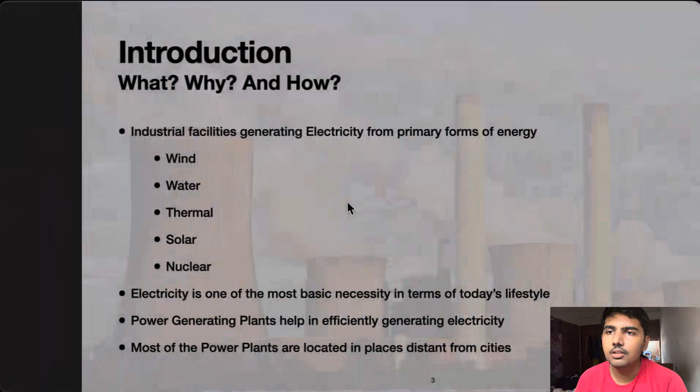The first question that might come to our mind is, what are power plants and why are they so important? To answer this, power plants are industrial facilities generating power and electricity from the primary forms of energy, which are wind, water, thermal, solar, and nuclear.

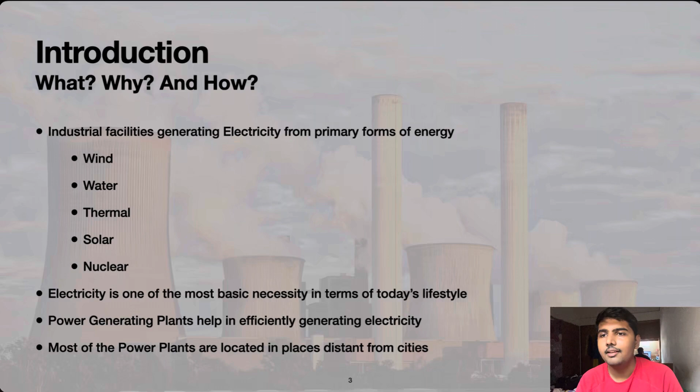Everything had changed after Benjamin Franklin's discovery of electricity and Edison's invention of the bulb, and slowly, entire humanity was consumed by it, making electricity as essential as water and food. Electricity has to be generated efficiently to conserve resources, as an overuse can cause problems for our future generations.

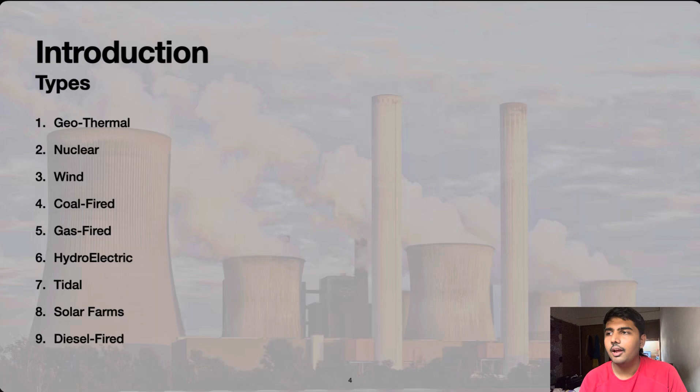Now, let's have a look at types of power plants. They can be broadly categorized into four types: thermal, wind, solar, and hydro.

Let's take a look at some examples of solar farms, wind farms, and other power plants. Solar panels spanning over a large amount of area is sufficient to generate a huge amount of electricity in a very passive mode. They consist of large collections of photovoltaic cells and can be used for personal use as well as industrial use.

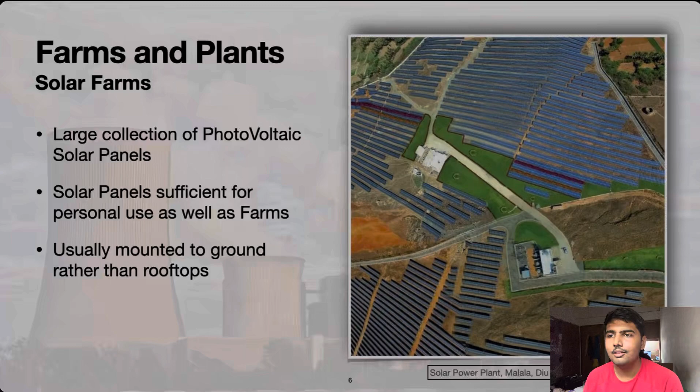Diu is one such example, where the entire electricity comes from a solar plant in Malala spanning over 51 acres of land. This has made Diu one of the only islands in India to have its own electricity generation grid coming from a solar power plant.

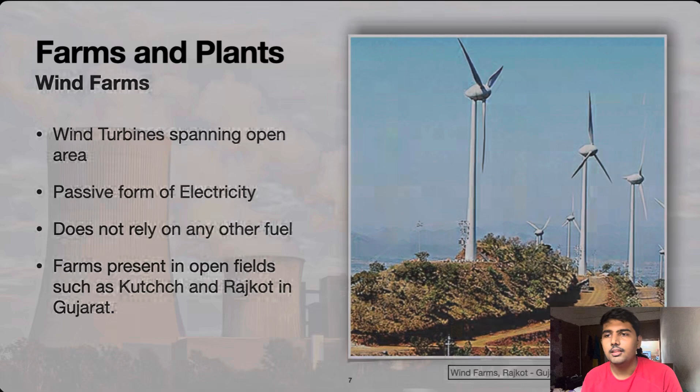Wind farms are chosen to be installed in open areas away from civilization as to not interfere with energy generation. Ideal wind speeds for a windmill farm to operate is 18 to 25 km per hour. They are the best form of passive energy as they do not rely on any other form of industry.

Next come the fuel plants, which are thermal-based power plants that burn fossil fuel and project the pressurized gas and heat onto a turbine. The most common residue are carbon dioxide and fly ash.

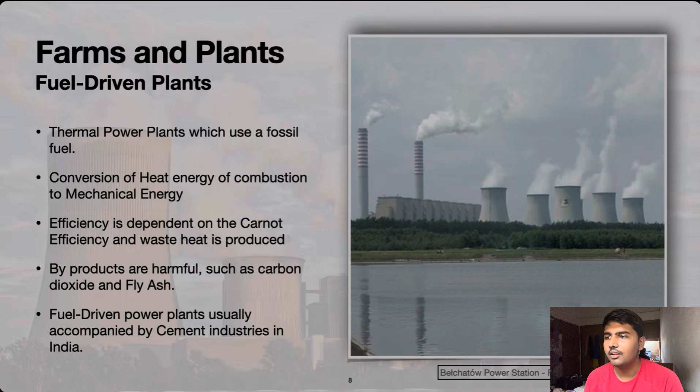Fly ash is used to help fasten the process of cement generation, and they are usually accompanied with a cement factory. The only drawback of fuel-driven power plants is the Carnot cycle and Carnot efficiency of the fuel being used. Also, it gives a very massive carbon footprint.

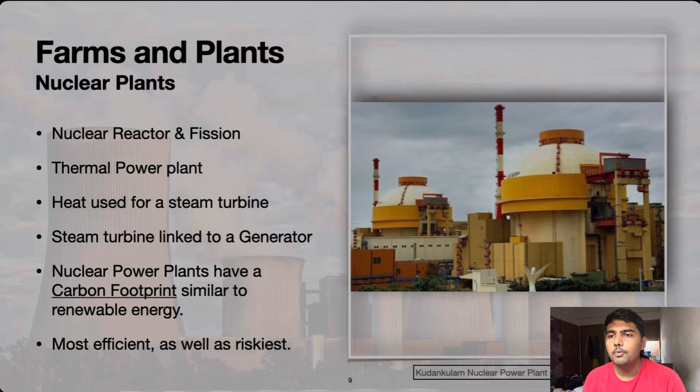Next is the nuclear plants, which work on the principle of nuclear fission. Fission is the breaking down of atoms, and this breakdown is what generates a massive form of energy, specifically heat. Fission is done inside a nuclear reactor, and the reactor then projects the heat to a steam turbine, generating electricity.

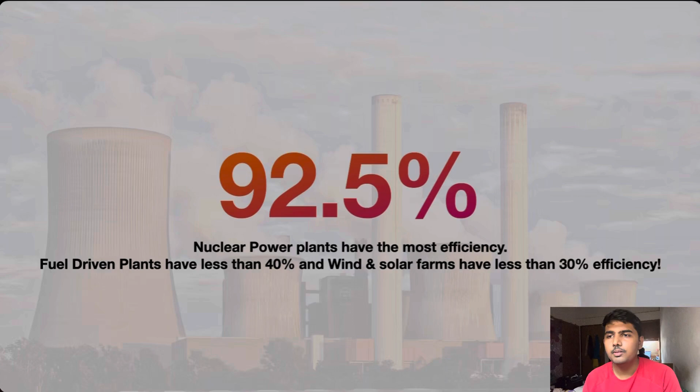They have a carbon footprint similar to that of a renewable source of energy. They are the most efficient source of energy, and they can generate clean energy at a whopping 92.5% efficiency. This is more than double of most of the aforementioned power plants.

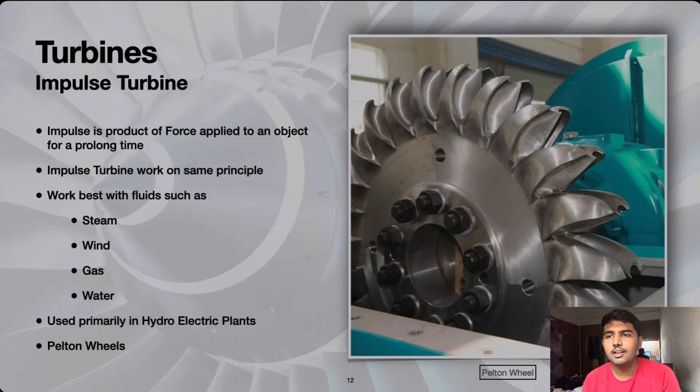Now, let's discuss the most important part of a power plant: turbines. Let's talk about an impulse turbine. This is one of the most commonly used turbines when it comes to any sort of hydroelectric power plant, and its functionality is rather simple. It works best when working in conjunction with any sort of pressurized fluid.

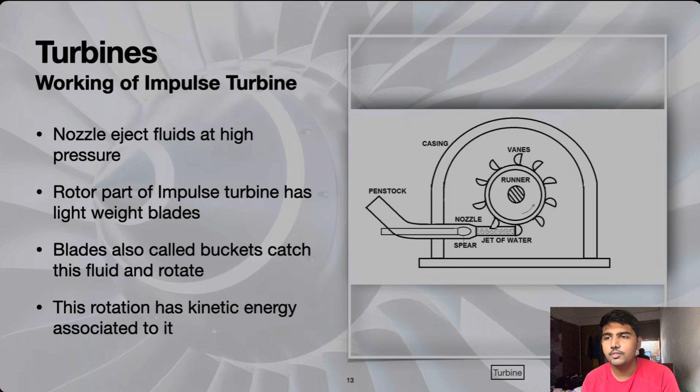One such example is the Pelton wheel. A Pelton wheel is a wheel having a set of blades on its periphery. It consists of a nozzle that ejects fluids at very high speeds. The rotatory part of the Pelton wheel then rotates the rotor part of a synchronous generator. The blades, or buckets as they are called, on the periphery are made of very lightweight material.

A synchronous generator is a type of generator having two major parts, a stator and a rotor. This works on Faraday's law of electromagnetic induction. Let's have a look at a short gif of how the synchronous generator works.

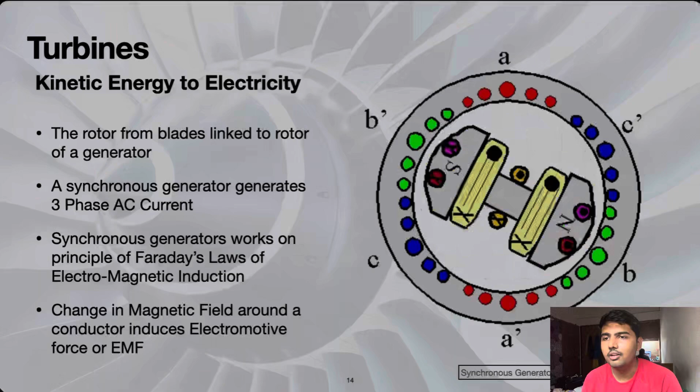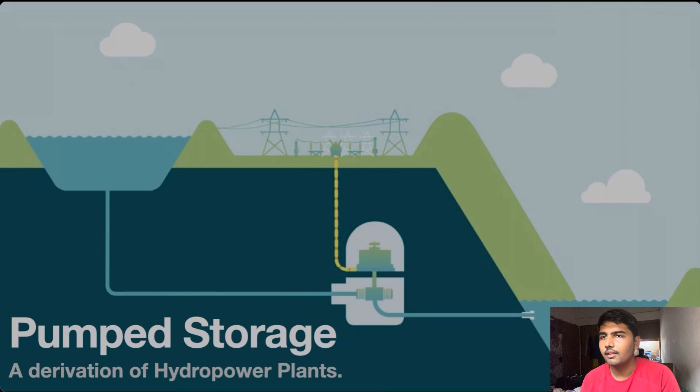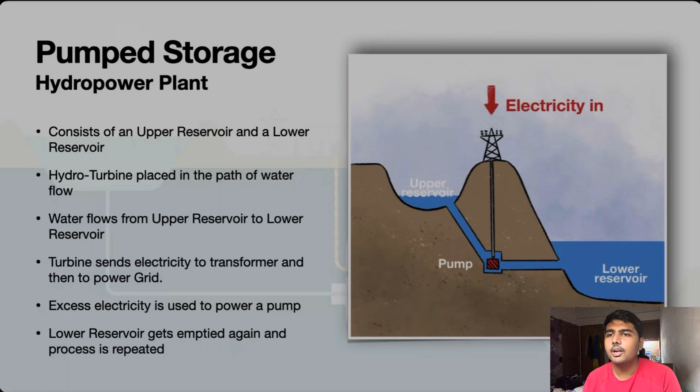Now let's have a look at the pumped storage power plant, commonly referred to as PSH or PSP plant. It consists of an upper reservoir and a lower reservoir. Water is allowed to flow and a turbine is located in its path that generates electricity.

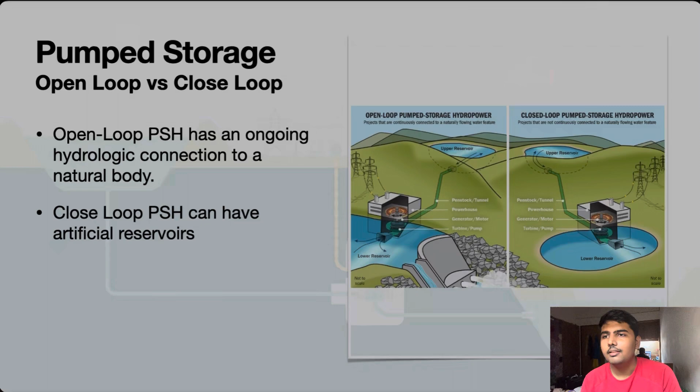The excess electricity generated is then used to pump the water up, repeating the whole process. They are of two types, open loop and closed loop. Open loop is generally associated with a naturally flowing body, whereas the other one has artificial reservoirs.

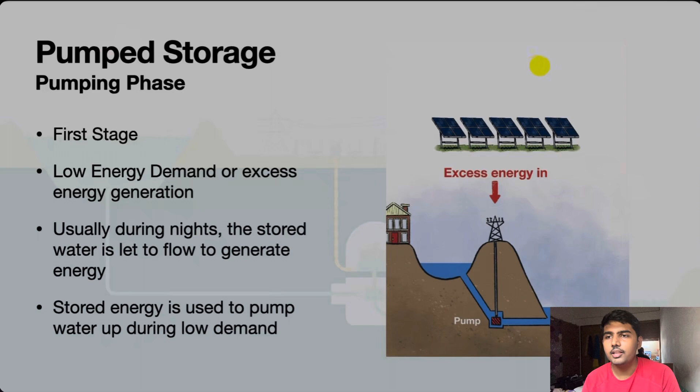Let's look at the first stage of a pumped storage power plant, also called the pumping phase. Water is pumped up to the reservoir when there is very low energy demand or very excess generation. During night, the stored water in the upper reservoir is used to generate electricity overnight.

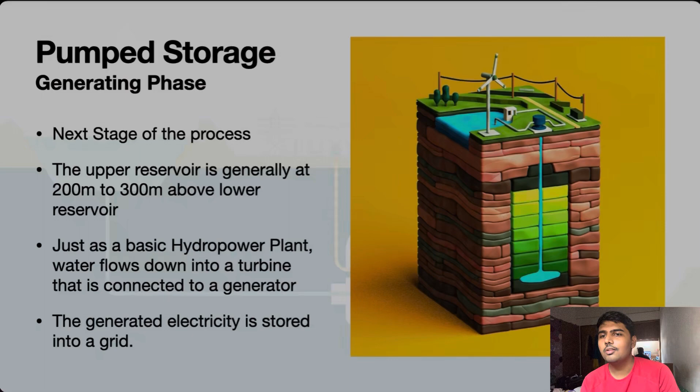The PSPP is usually accompanied with a renewable source of energy such as windmill or solar panel to meet the demands of pumping water. This also makes the most of hydroelectric power, as hydroelectric power is the most efficient source of non-nuclear energy with minimal waste.

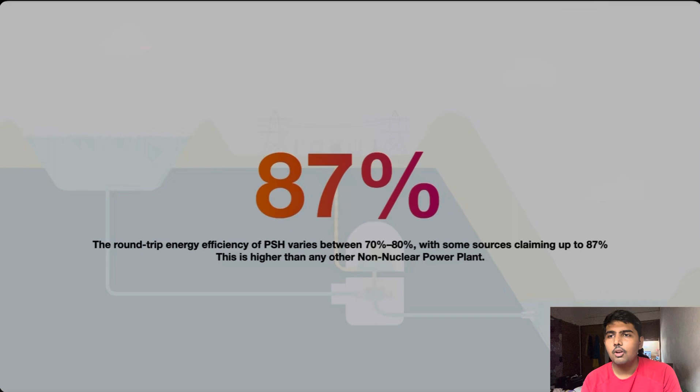Clocking at up to 87% efficiency, the PSH or PSPP is one of the most efficient sources of electricity generation.

Let's have a look at the benefits of having a PSPP. As discussed earlier, it is one of the most efficient power plants and fetches around 70 to 80% round-trip efficiency when not paired with a renewable source of energy.

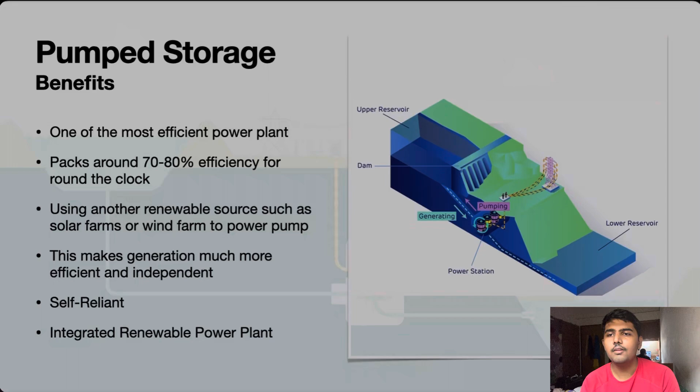Using another source of energy to pump water makes it almost as good as a nuclear plant, without the risky nuclear waste. It is self-reliant and does not need much human interaction. It is a type of integrated renewable power plant.